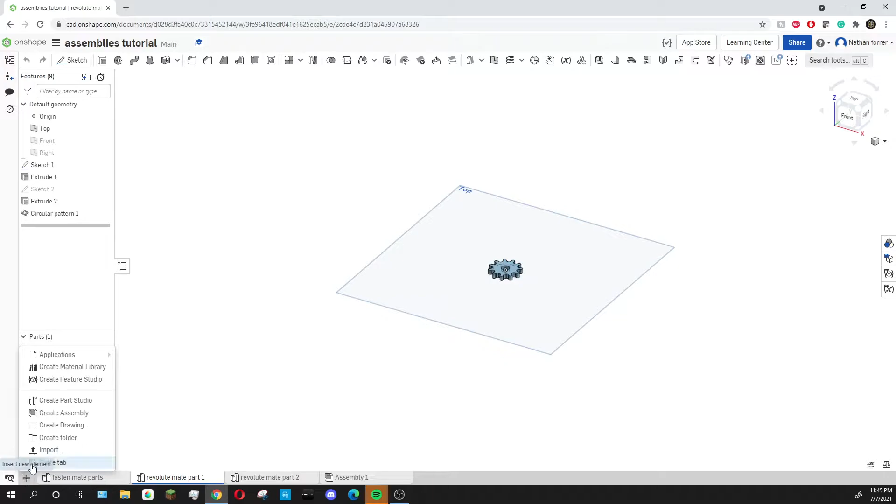To start out, I'm going to create a new assembly. I'll go down to this plus button and click Create Assembly, then move this assembly down to the end just to stay organized.

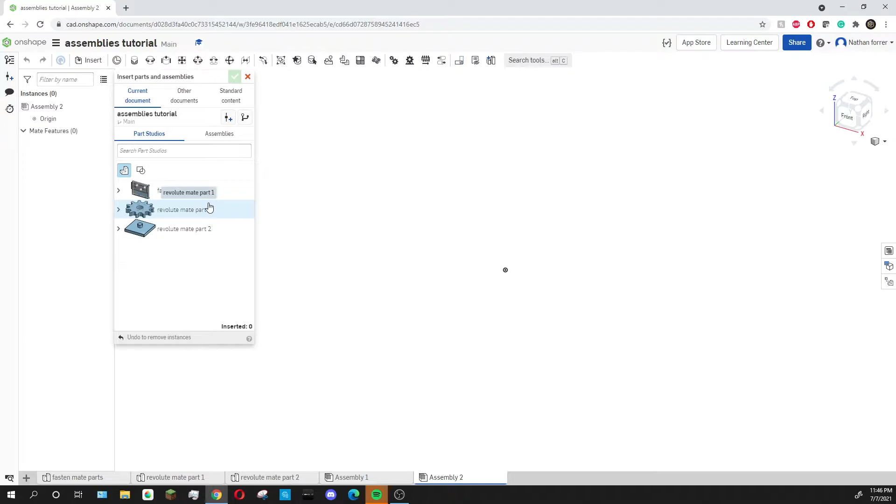Now that I have a new assembly open, I'm going to press Insert and bring in our two pieces. We're going to do this a little differently from how we did it with the Fasten Mate, where we brought in two parts from the same part studio. This time we're going to do two parts from different part studios in the same document. The first piece is this gear, and the second piece is this base piece.

I'm going to press the green check mark to confirm those, then move this out of the way because I want to fasten this base piece to the origin. This will do the same thing as fixing it, except it'll be directly on the origin. It doesn't make a huge difference, but I like it to be centered.

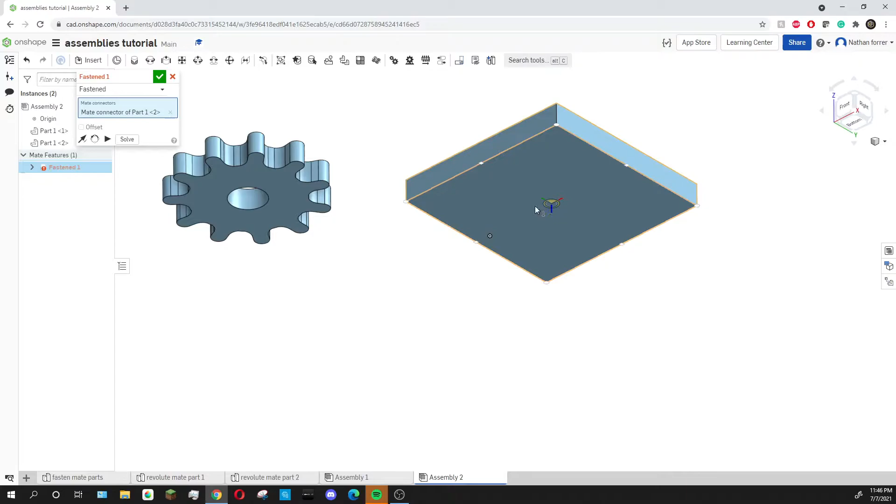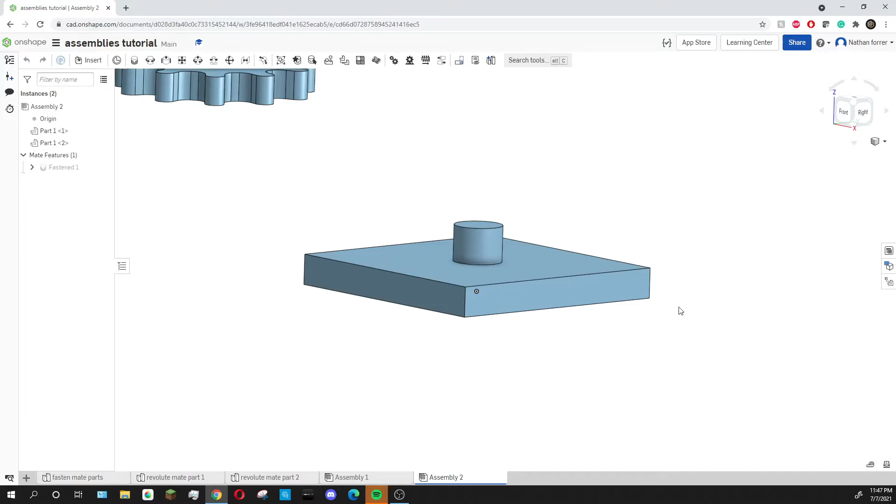I'm going to click the bottom of this piece, then click on the origin, making sure all the axes are oriented right—you can see the blue one is facing upwards, which will keep this right side up. If I click the check mark, I now have that mated into the center, and I can no longer move it around at all—it's directly on top of the origin.

Now what I want to do is make this gear rotate on this pin. So I'm going to use the Revolute Mate, which is located right next to the Fasten Mate we went over in the last tutorial, and it works in a very similar way. It uses mate connectors—the first mate connector is going to be on the bottom of the gear, and we're going to choose the one directly in the center of this hole.

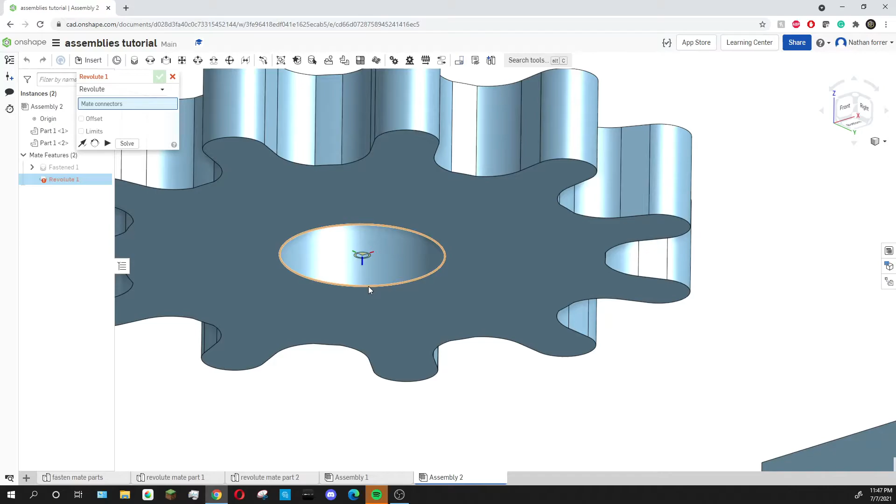If I just hover over the circle and click there, you'll see a mate connector forms. Then I'm going to do the same thing on the bottom of this pin, and press the check mark. So now I have my gear here, and if I try to spin it around, you can see that it spins around that pin piece, and I can make it spin indefinitely in any direction.

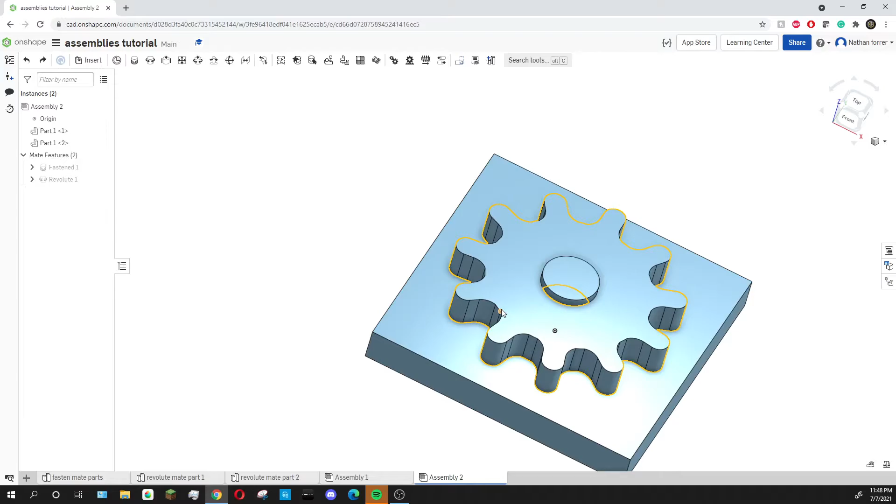One thing we might want to change is bringing the gear a little bit up on this pin. You can see it's exactly level with this surface, which is a little bit unrealistic.

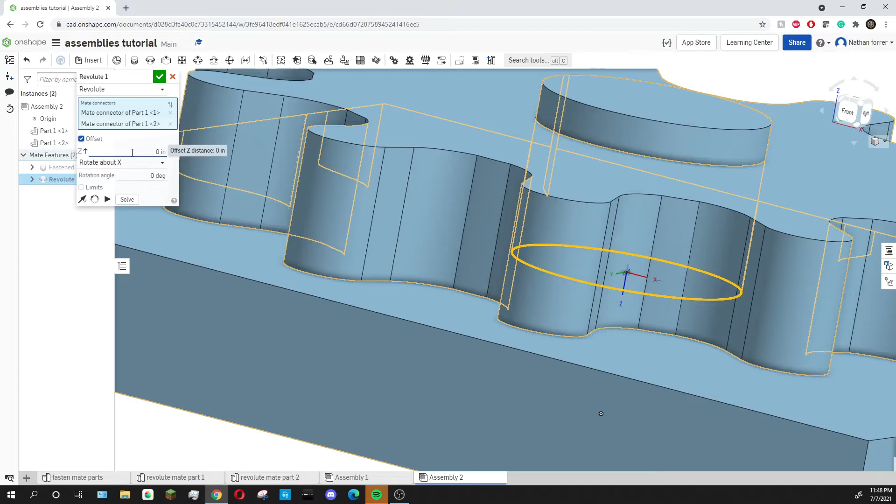So I'm going to go ahead and edit the Revolute Mate by double clicking on it, then click this checkbox next to offset, which will give me more options. The first one I want to change is the offset Z distance, and if I change that to 0.05 inches and press enter, you'll see the gear goes down, which is the opposite of what I want—I want it to go up. So I'm going to add a negative out front, and there you go.

So the gear isn't perfectly flush with this part, but I'm going to leave it for now, and we're going to move on to the rotation angle.

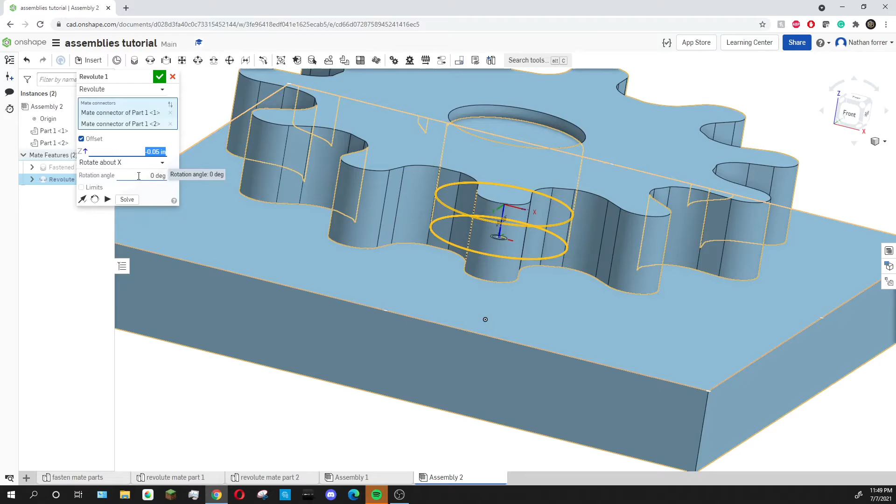If I change this to 90 degrees and press enter, you'll see that the gear is now rotated. So you can just rotate your mate by using that rotation angle rather than completely redoing the mate. For this example I don't actually want that, so I'm just going to put 0 in there.

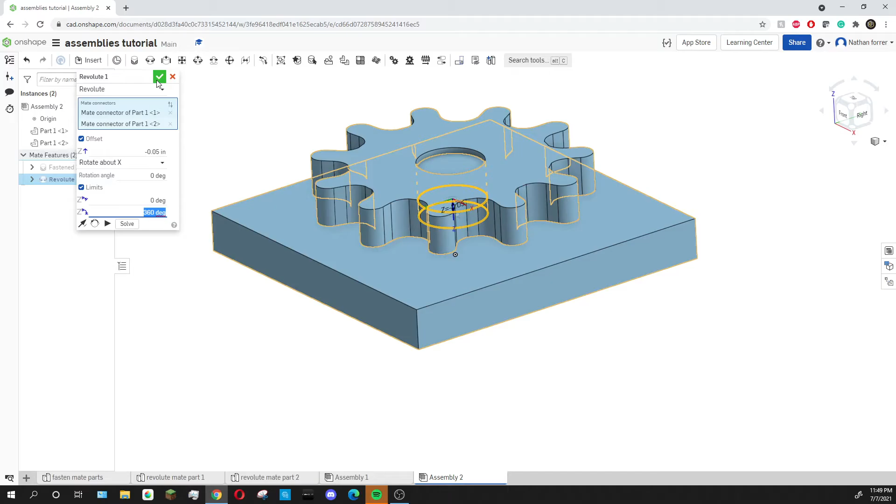Then I'm going to create a limit. What the limit will do is make the gear only able to turn a certain amount of degrees. So where before we were able to spin it indefinitely, this will limit it. I'm going to start with my minimum at 0 degrees and my maximum at 360, then press enter, and press the check mark to confirm those changes, and I'll show you what that's done.

So when I try to rotate this gear in this direction, you'll see that it moves the same as it did before, but once we get to 360 degrees, it'll stop and I can't move it anymore. The same thing will happen if I go back 360 degrees to where we started - it'll stop and I can't move it anymore. So that's what that limit does.

Now that we've added our limit and offset, I'm going to show you one more thing you can do with mates and how to insert assemblies. If I go up to the insert button, just like how you can insert part studios like we've been doing, you can also insert assemblies.

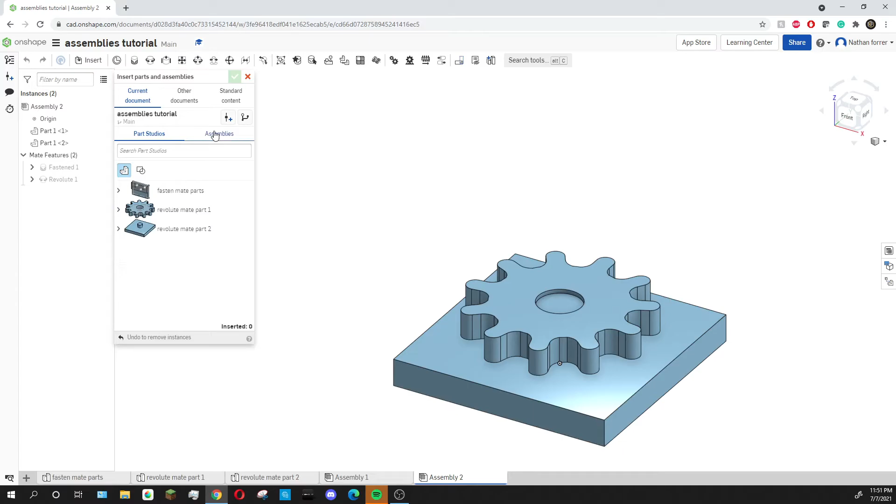So if I go over to assembly, and I go over to assembly 1, which we created in the last video, and I just bring that into this document once it loads, and press the green check mark just like we've been doing. You can see it's kind of large compared to the gear, but I'll show you how this works anyway.

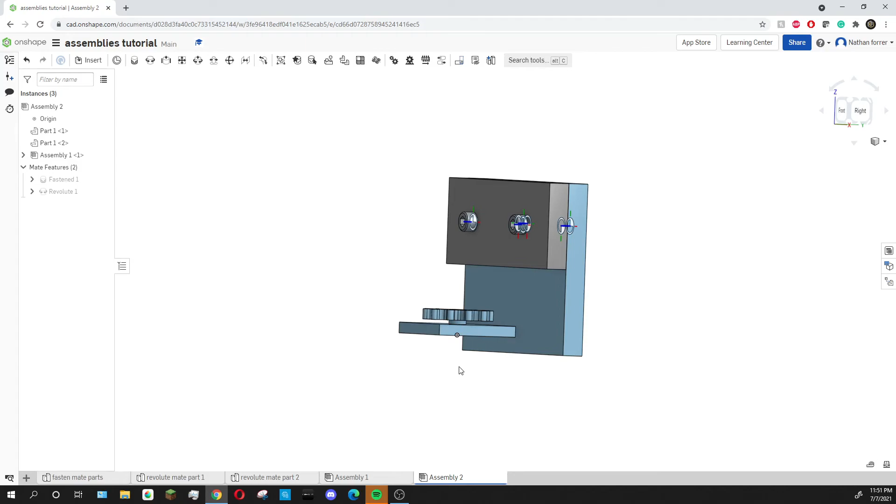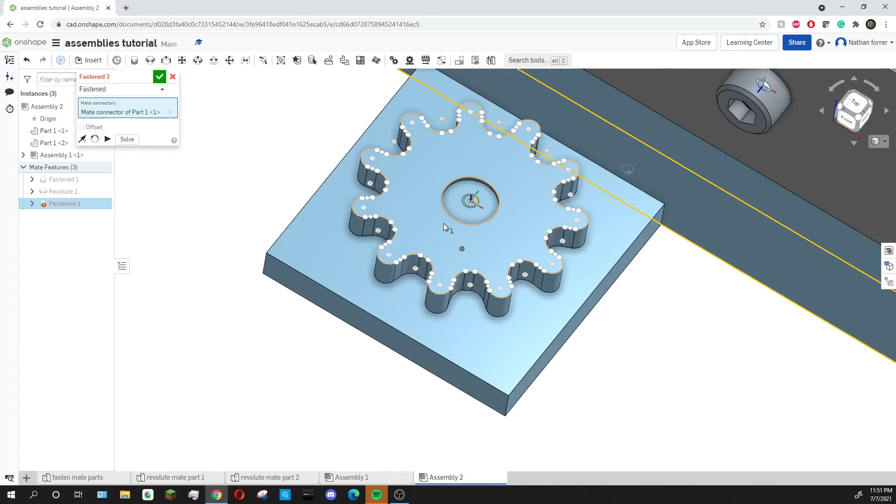So I can stack mates, which means if I use another mate on top of that Revolute Mate, so if I mate this to the gear, this piece will spin with the gear. I'm going to click this Fasten Mate tool, then use the bottom of this part, and the top of this gear. You can see that one part of the piece has now snapped onto the gear, and the rest hasn't come with it.

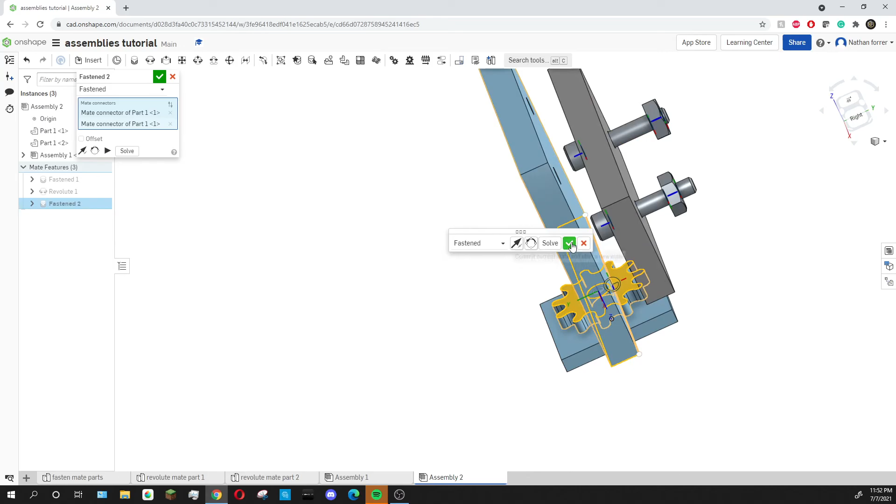So it looks like something's gone wrong here because we want all of the pieces to stay assembled on top. But if you just press the green check mark, everything else will go back to its correct place. So you don't need to worry about things not staying together before you confirm the mate.

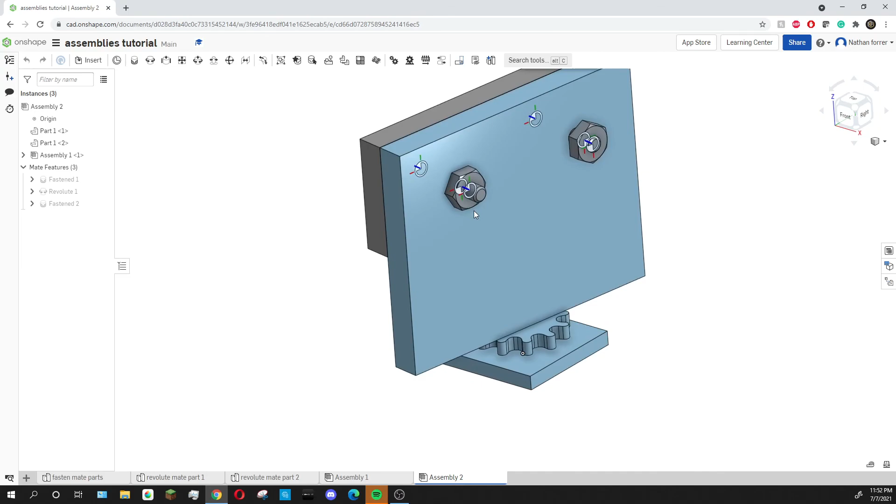So now when I try to spin this gear, you'll see that the piece on top of it moves with the exact same limits that we created on the gear - it goes 360 degrees all the way around and then stops. And we can also control it from this piece; we don't have to click on that gear to rotate it. So I can click up here and it'll have the same exact limits.

That's how you can combine different types of mates to create a larger, more complex assembly. You don't have to keep it to just two pieces sticking together - you can have as many as you want, and they all interact exactly how you would expect them to.